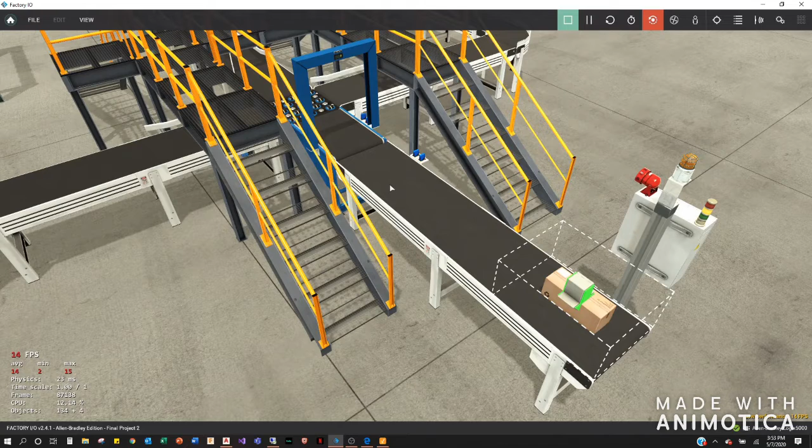Box comes up, stops, waits, goes on to the conveyor belt that weighs them. The weight is displayed up here on the display. Again, 2 sensors to make sure it picks the box up. Once it weighs it, these pop-up wheel sorters will go a direction depending on the weight.

These sensors here cancel out the memory that holds these in, because obviously as the box moves on and moves off, the weight on the conveyor itself is going to change. So these cancel out the memory that holds it in the correct direction. Then it goes down the conveyor belt over to the pick and place robot.

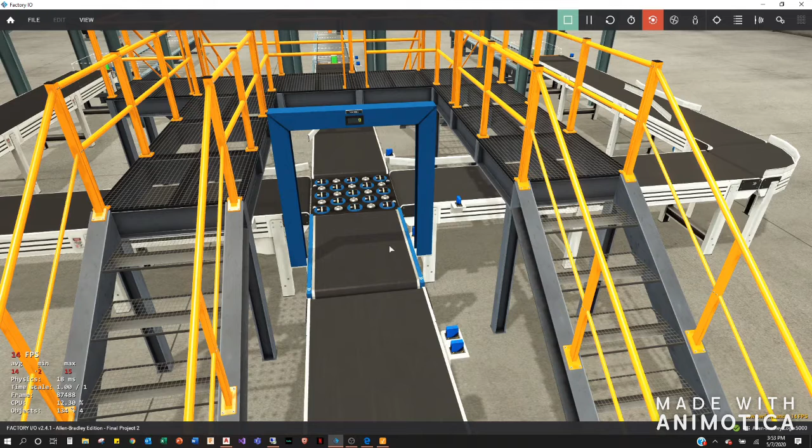As soon as it hits this sensor, this stop blade will help straighten the box. This pick and place will come down, grab the box, place it on the pallet, and off it goes. There's 3 little screens here on each machine. That is for the pallet count that machine has produced. The flashing yellow light is just the reset button that resets that count.

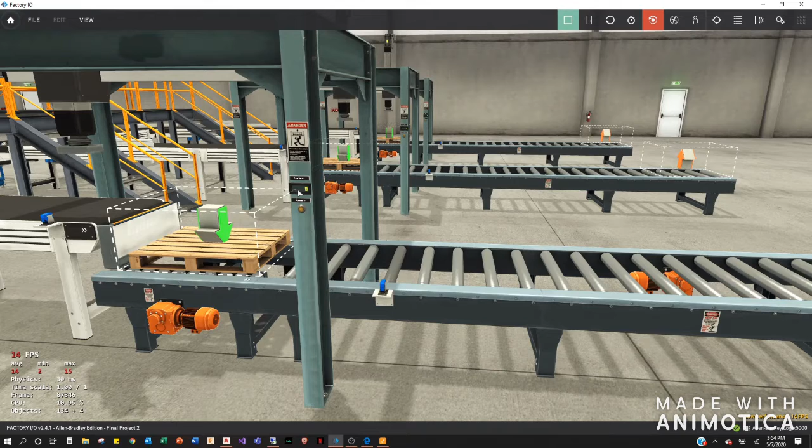We also have lights on top of each machine indicating whether it is ready to go. Right now they are yellow because the factory just needs to be reset, which is also why this light is on. Over here to the panel, the button that would reset it would be this one. That's going to let that yellow light go away. We'd be able to hit the green button on it to make it go.

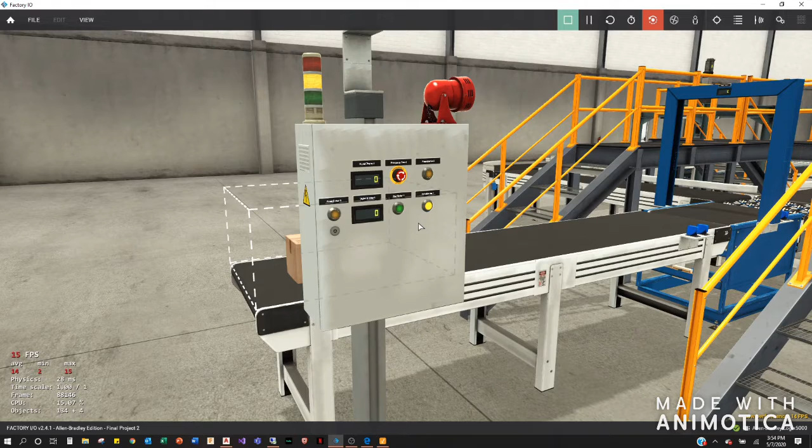This flashing one is just to reset the entire factory. So if I were to press it, this box in the background would disappear. Resets the whole factory. You can click that as many times as you want. It's not going to do anything but reset everything. This button here clears the count off of this display because this displays every pallet count all added up.

So we'll hop into it, press play, watch this bad boy run. But due to latency and some connection issues that I just haven't been able to figure out or fix, every now and then the e-stop will let go, causing this machine to stop. There's no really big deal about that other than the fact you just have to come over and press the start button again. So we'll start it up and then we'll follow a box through the process.

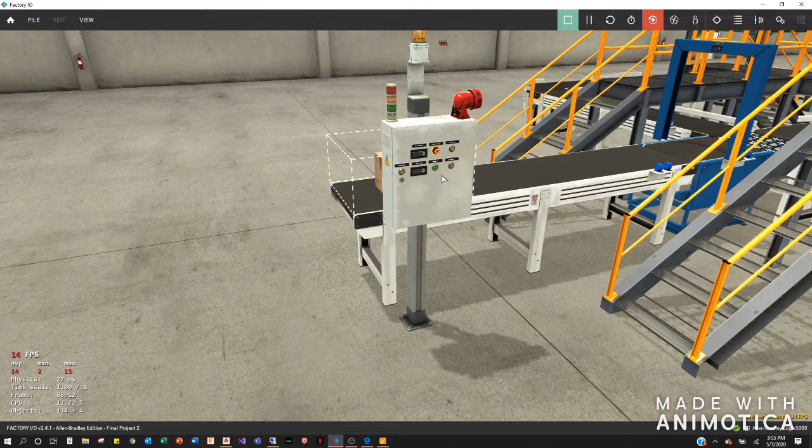We'll be able to lock onto this box and follow where it goes. This one's going to weigh between 7.5 to 8 pounds. So with this display it's going to bounce back and forth between 7 and 8. When we go left, that sensor cancels out the memory so they go straight again. We're going to wrap around this corner here.

These 2 blades will straighten it out as much as it can because in FactoryIO you can only place stuff in certain locations. So that's as close as I can get without squeezing the box too hard. This blade will straighten it out like I said. Pick the box up, put it on the pallet, and off it goes. So now we'll let go of this box.

Now we'll trigger an alarm. We can do this by hitting the settings, clicking on this pick and place, and forcing a fault. This will force it all the way over as if it were to be fully powered. Now it should not reach this box. It'll continue its cycle like it should, but now with this box sitting here too long, this sensor here is going to set off the alarm.

The e-stop faulted out like I was talking about, but the alarm was still able to go off because the sensor was held down. Now that's going to spin, the siren's going to go off, and all 4 lights will be red. 1 on each machine, and then obviously the one on the panel.

Now we can shut this alarm off by hitting the e-stop button, hitting the reset, saying we're ready to go again. You could, if you wanted to, hit this button, which will clear all the boxes off. And I'm just going to do it just for now. Hit that button, clear all the boxes. We'll make sure to go and take our fault back out of our machine, so it's ready to go again.

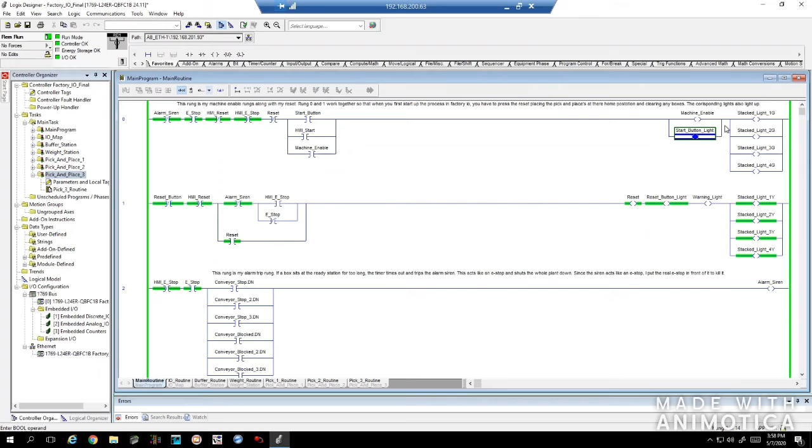This is also just the reset logic, so that when you press the start button, the reset makes it so you have to press it again. And we'll just go down. This is just the flasher bit created with the two timers here, so that they just toggle back and forth basically to make these flash on and off.

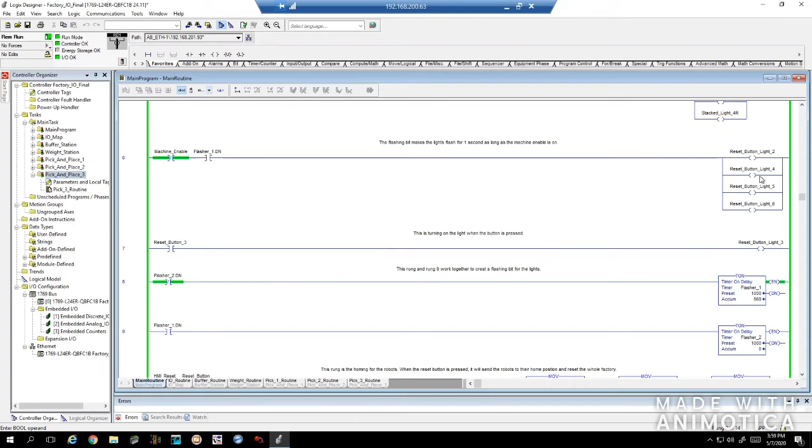These are the moves that make it reset. So when you press the reset button or the reset on the HMI, it will force all the robots to home or 0, 0. And then down here we have the counting. So this is where each pallet count gets added together to have the grand total. So currently we're sitting at 8 pallets made.

We'll jump over the IO routine. This is basically just where all the buttons are mapped over. So a button from FactoryIO is mapped to a button or a bit that we commonly know in our program. So here's all the Boolean inputs mapped over to known tags, and vice versa. Here's our known tags mapped over to our Boolean outputs. So this is where everything's going to be at for that.

You can find every tag in this list. Every tag that's in FactoryIO will be in here as well. You can always just add in tags as needed. Here's the pick and places, so we're moving numbers into the pick and place, and then it moves it over to that output. That way we're not trying to put numbers into something when we have no idea what that is. We just reference it to our pick and place that we know what it is.

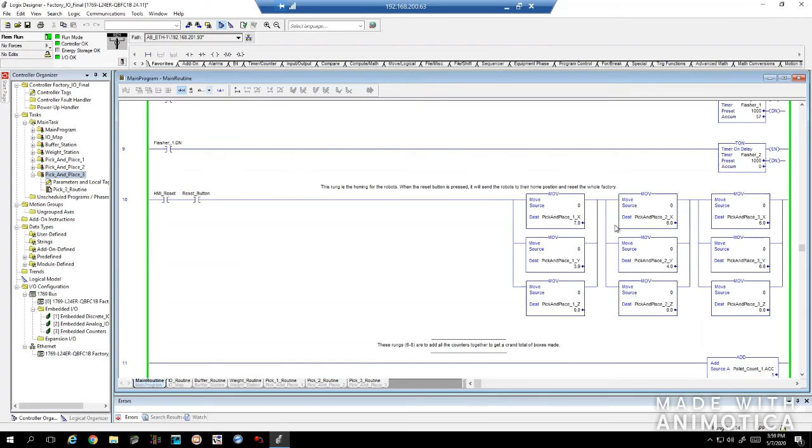Same thing going on here with the displays. We're moving numbers into the display tag, which then moves it into the I/O tag that we would normally not know of if it was sitting in a normal routine. We'll jump over to our buffer station. This is where it delays the boxes coming on, so when the sensors are not met, the conveyor belt will be on. We have our timers making our break, so right now they're running because the program is still in the background.

This here is going to be our weight routine. So this is where I said that it takes that break, or it locks in that time after taking the break on the conveyor. So after the box has sat here for long enough, it'll lock in this wait done timer as long as the machine is running. Obviously right now we've hit the e-stop, so machine enable is off.

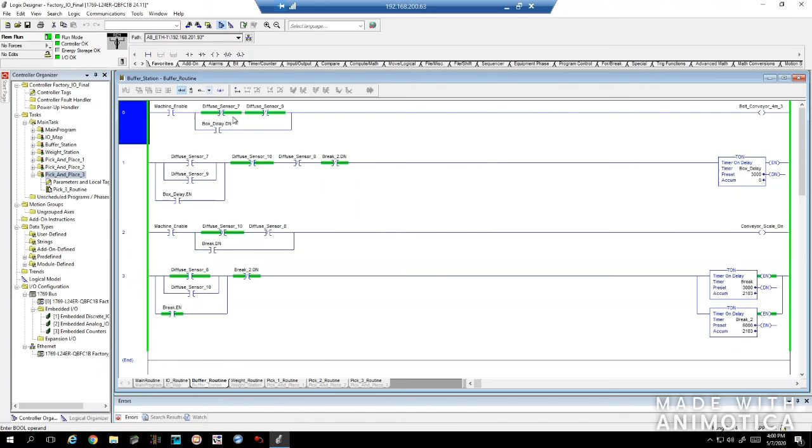Now if I were to hit start again, this would lock in this memory because both of these are true, because it is less than 4.1 but greater than 3.9. Locking in that sorter right, because it has to go right, and then this wait timer would then lock that in so that we can hold it on until the box gets off the conveyor. Same for all three directions.

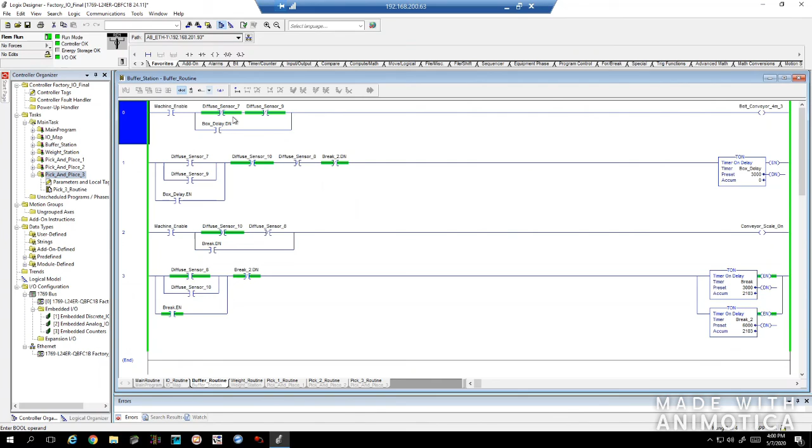The pop-up sorter is always on. That way, if we are at that 5-pound weight, roughly, then it'll just go straight. There's obviously no turns to take. And then this is just moving those values into the display.

As you saw on the main panel, I didn't talk about that top display. That's because that one is currently not working. You can see the number here being forced into that display, but it's just not showing up in FactoryIO for some reason.

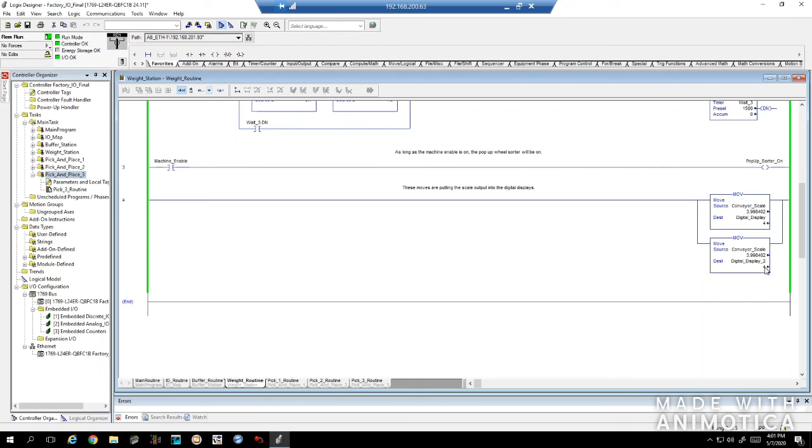This here is going to be the pick and place 1 routine. So as I scroll up, you can kind of just see it's a lot of moves, a lot of timers. Get to the top here. Basically, the stop blade is on all the time. That's what helps straighten out the box when it gets to the sensor. As long as the machine enable is on and the sensor is not tripped, the blocked conveyor